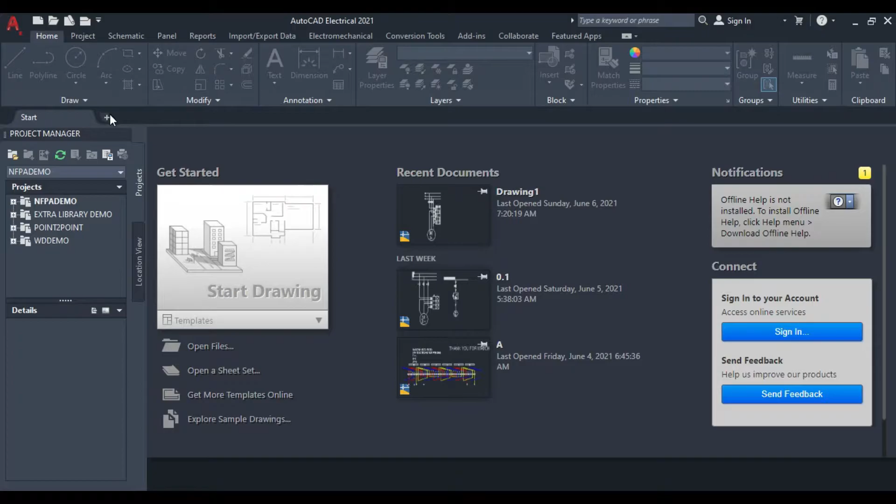We are on our third video about AutoCAD Electrical. So today I want to draw a right and left turning key that is a three-phase key. So let's start. Click on new drawing. Wait until it opens.

So now that it's opened, click on line. We are going to draw 3 lines. First line, okay. Now choose dimension. We will make it about 2. I think 2 is good. It doesn't matter. We just want them to be at the same distance. So we'll make it this much. Okay. Click on it and click on copy selection.

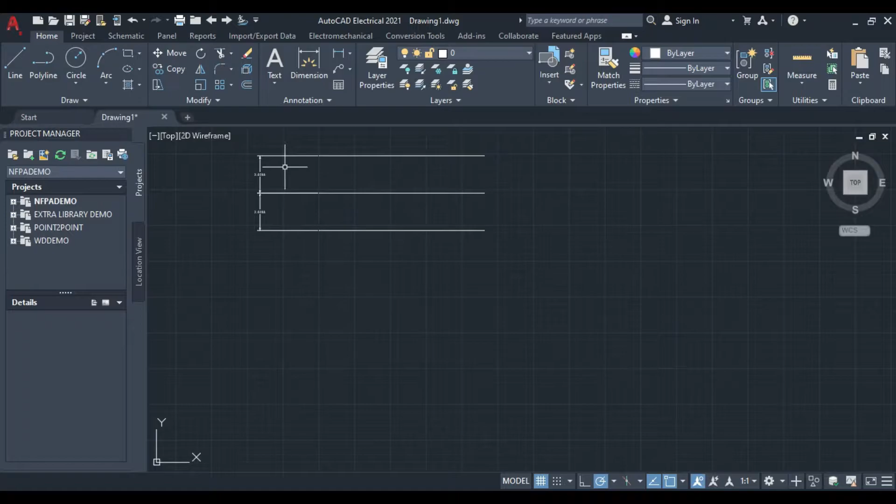So now do it again. So we are all set. Click on the first line that you have drawn and click on copy selection and copy it again. So now we are all set. Delete the distance that you have made by erase. So now it's all done for now.

Now we'll make 3 lines for the phases coming out. 1. So now we are going to make distances. So how much should this distance be? It's like about this. So it's okay. We will copy selection it again in here. So we are all set again in here until there.

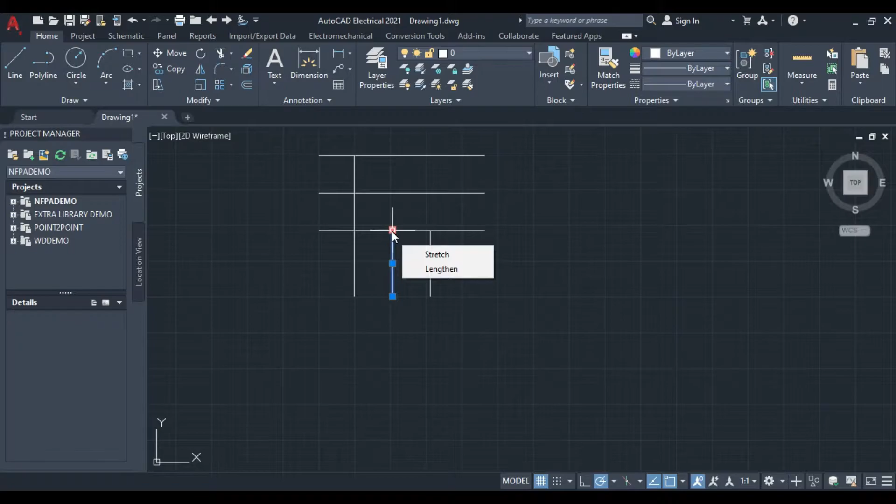From here until here. So click on this and this and erase. So now I think I made a mistake, so connect this to the second line. Okay, we have our 3 phases. Now click on text. It should be a single line one.

Now we are going to write L1 for the first phase, L2 for the second phase, and L3 for the third phase. So now make them in one line and in one position. So it should be there and it should be here. I think no, here is good. So we are all set and we have all the 3 phases.

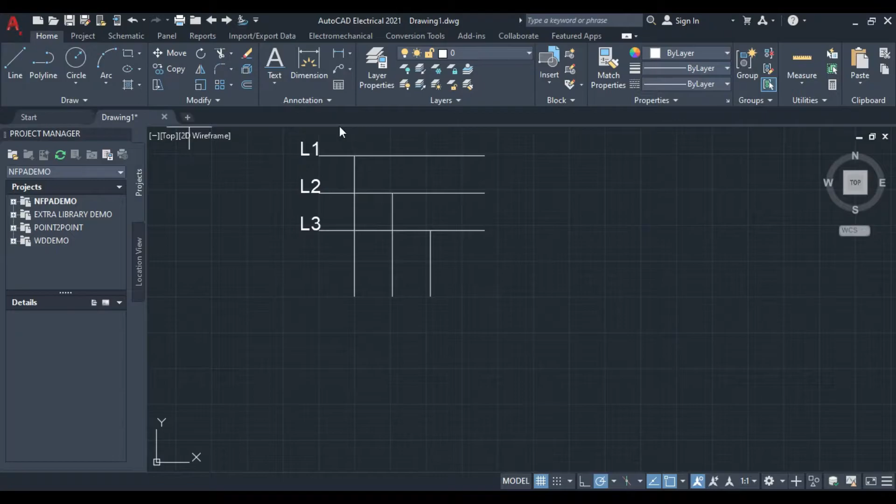So now draw a box. We will use rectangle. So go here a little down, cancel, press. I will do it again. I will make your work easier here. As you can see, each of these should be 3 squares, and we will make 5 parts: 1, 2, 3, 4 and 5. So from here 1 part is here.

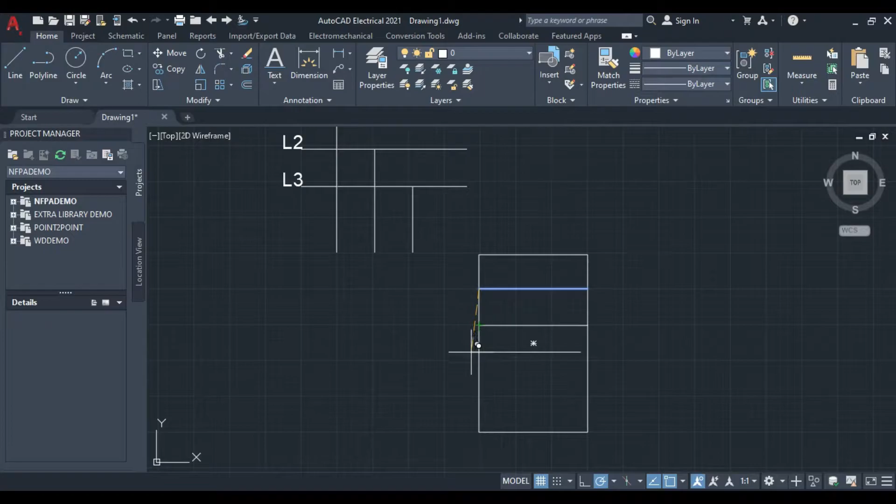Click on copy selection and move all the way down, and again copy selection and again. So here we are all set. Click on line again and go all the way down. Thank you guys if you've done it. And again here we are all set. So move it a little bit down.

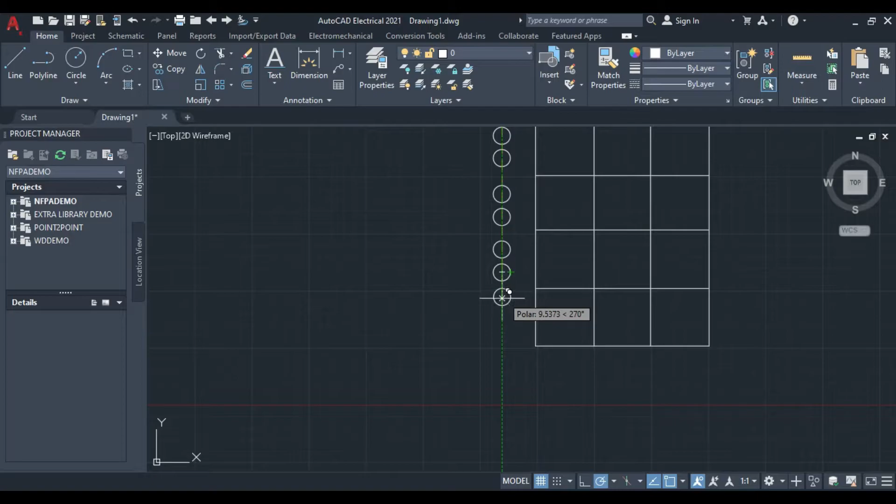So now you should draw some circles with numbers. Here 1 circle, we copy selection it here, here, here, here, here, here, here, and here. So it is good and they are in one line.

So now draw a number for each of these. Move it a little bit near the shape. Here is good. So now we will write numbers, single line, zoom, and I think it's good.

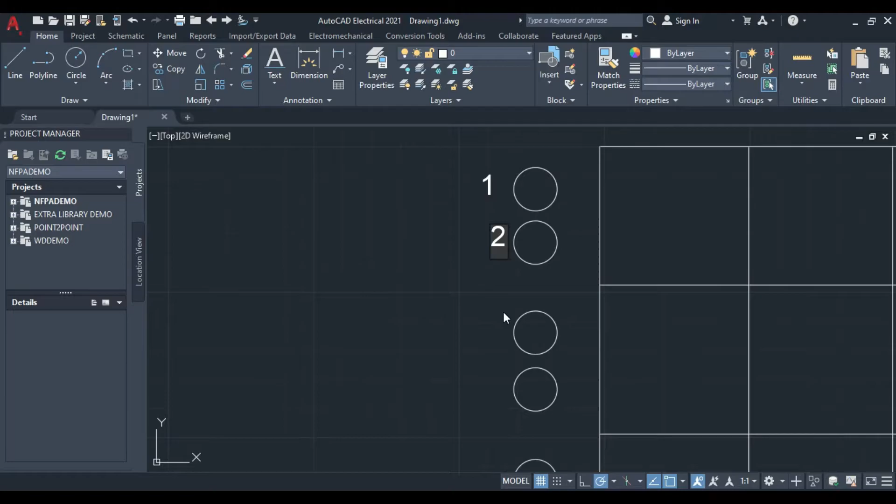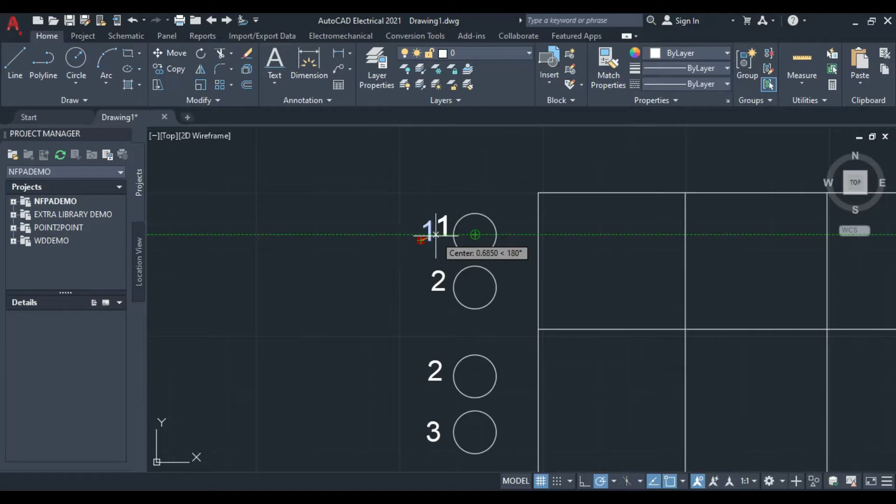So the number of this should be 1, the second one should be 2, after that again 2, then 3, 3, 4, here again 4, 1, 5, and 6. So it's all the way down for this. So now we should make them in one line. Here is good for 1, and should do it for 2 too.

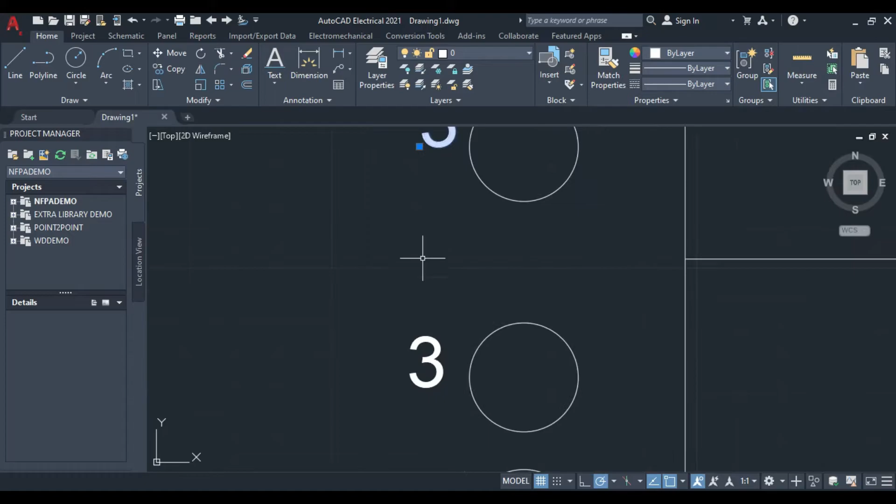Again, you will do this until all the numbers are in one line and in good shape with the others. This will make your drawing better looking, and you will be a better engineer if you pay attention to these things. So we are doing it all the way until then.

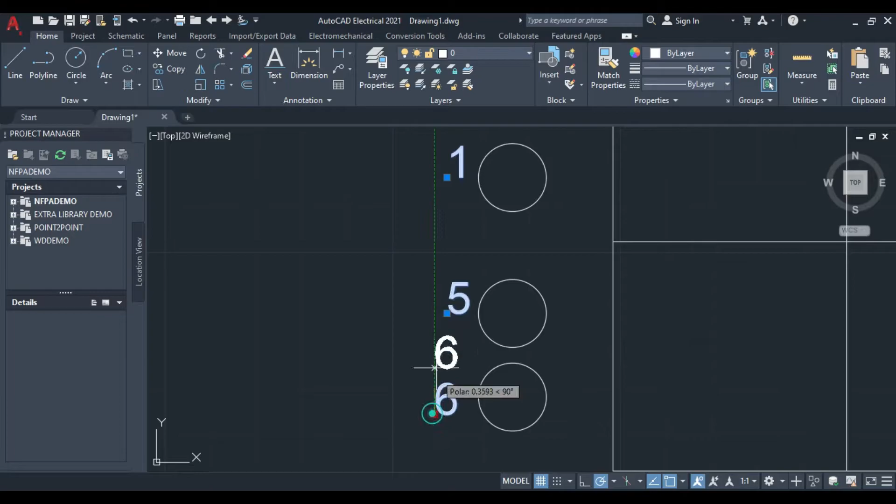You can do this when you are drawing the circle, and it will be more efficient, and you will spend less time on numbers, but at that time you should do something else too, and it will take some time, but it's okay. So it's all for the circuit diagram. Now we should connect some parts.

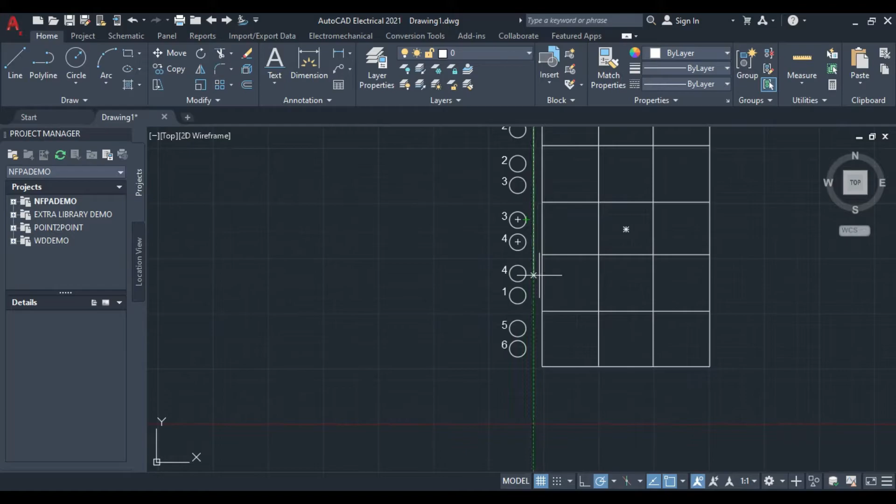For example, here, as you can see, I'm taking it all the way down to 1. So you should see here is 1. So here is connected to 1. And we are going to connect some other parts here. Here, as you can see, 2, 2. And now we are going to connect 3 to 3. So now we are going to connect 4 to 4. So we are all set.

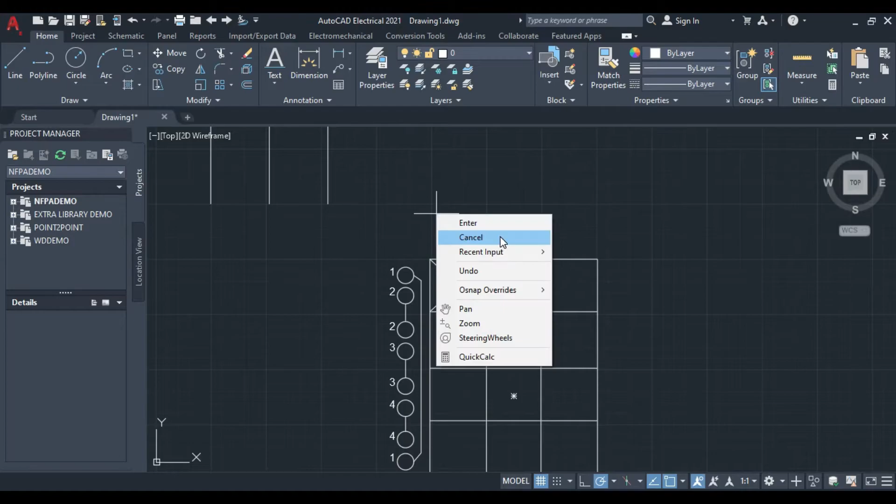And we should remember doing other things too. Here we have a connection. When you turn your key up or down, it will be like this. The way that the switches will connect to each other is defined by these x's that you have in your shape. So you should draw one in here too, and one down, and again. And I will explain why we don't have any x's in the middle part of the shape.

So do it for all of your shapes, until you reach the end. So the end has two x's, and you may ask why. Because when we want to turn a three-phase electromotor right or left, we only need to change the position of two phases. For example, we can change 3 with 1, or 2 with 3, or 1 with 2. It's not important which one you choose, but it should be two of them.

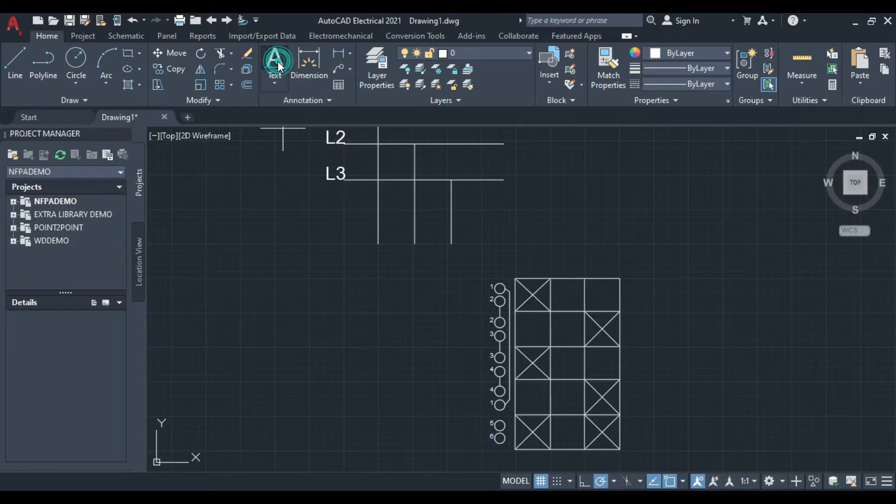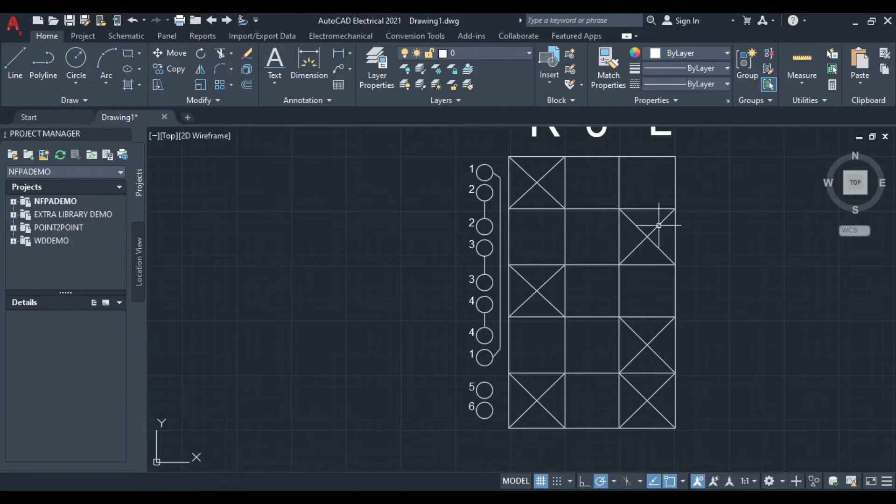So now we are going to write here a big R. It means it will turn to right. Here a 0, and here an L for left. So you may ask why in the middle we don't have any x's to be connected. Because at the 0 point there is no contact, because the motor is off. When we turn it on, for example, we make it down, it will rotate to right. So the rotation is to right, and the part 0 is for stopping the motor.

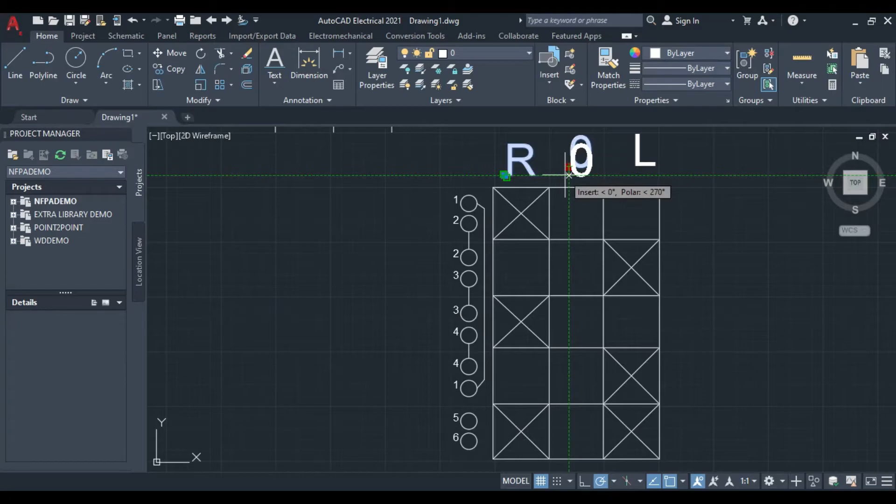So now do it for all your shapes until the end. So here we are all set. Now we need to move all the shapes up a little bit, move them up. So here we are. Now that we have moved them, we need to draw another circle, and I will tell you why and what this circle is for. So this circle is practically our three-phase electromotor.

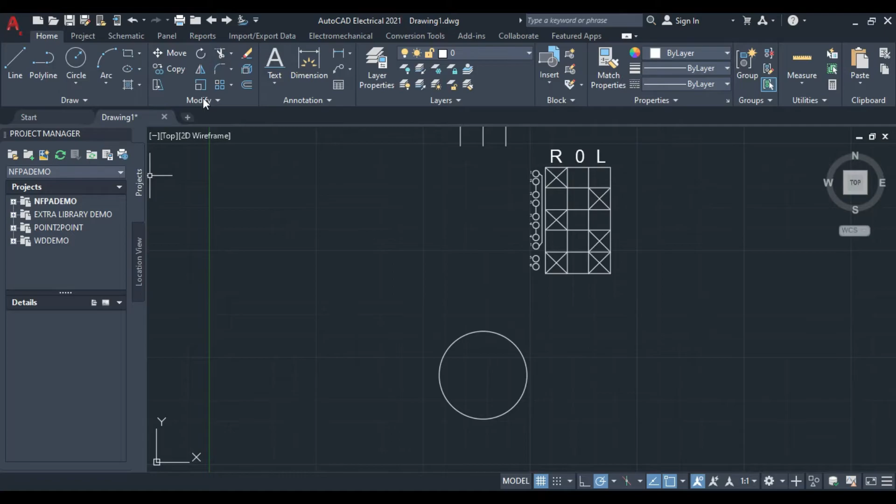And you may ask, doesn't it have any special symbols to say it? And we say yes. So for a three-phase motor, we draw a big M. So here is our M, and you need a three and something to indicate that it is alternating current. So you will click on this. It's a little small for here, so we need to choose another or make it bigger. So I think it is good now.

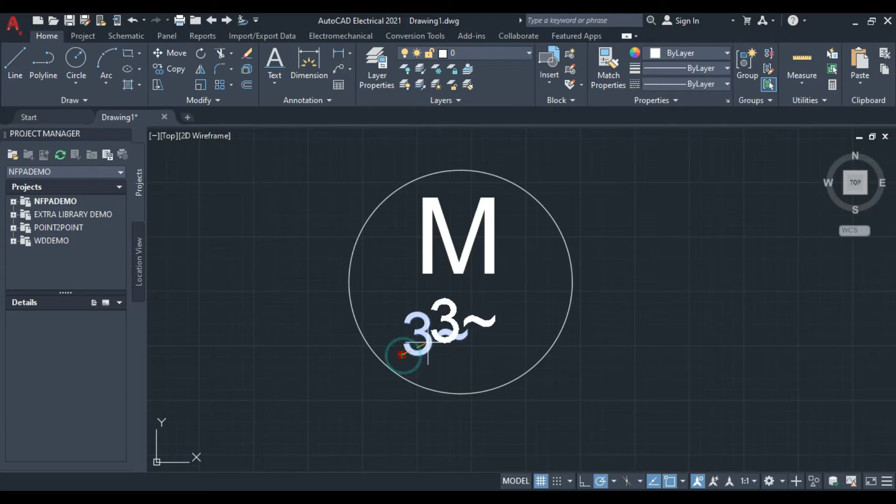So we write 3, and after that alternating current. This represents that this is alternating current. So we have our shape here. So now we are going to connect the 3 phases to the key that we have. So the first phase that we have will go here. As you can see, this line will help us know our line is straight and where it ends. We are going to connect the number 2. The number 2 is going to connect to 3.

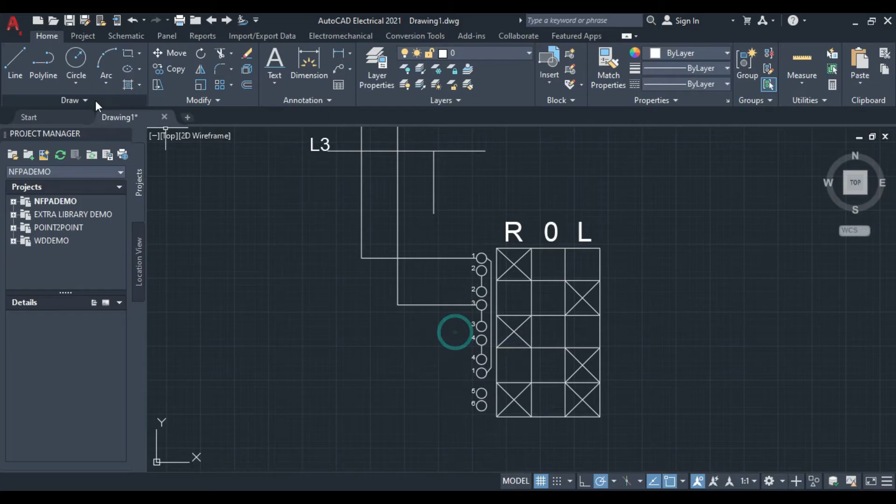So here it is, as you can see, and here too we are going to connect it to number 5. So here is our number 5 connected. So all of the phases that are coming in are in their right position. So now we are going to draw the way out. So the first phase that we have is coming out from 2. So here it is connected. This is not a straight line, so I will make it a little bit straight until here.

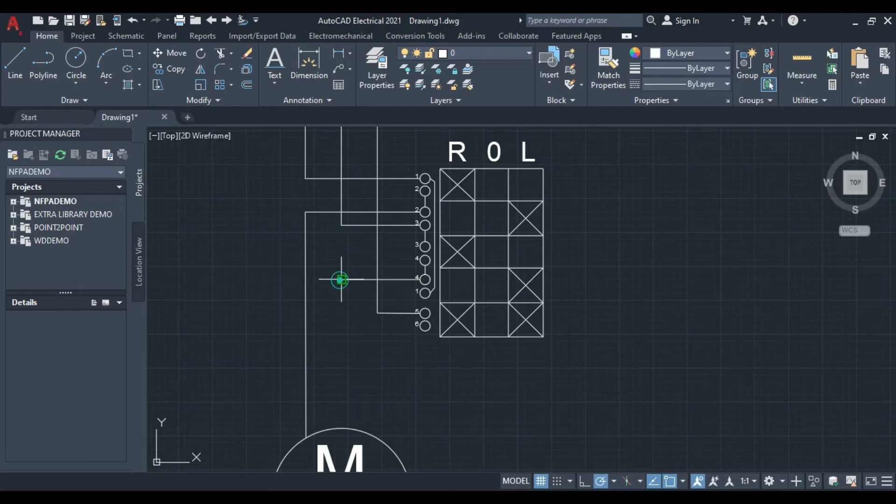So now we will move it down a little bit. Oh, it's straighter than what it was. So this is for the first phase. Now we need our second phase. The second phase is coming out from 4. It's here, as you can see, and it will be right there. And the phase 3 is coming from the number 6. So it will be like this if you want.

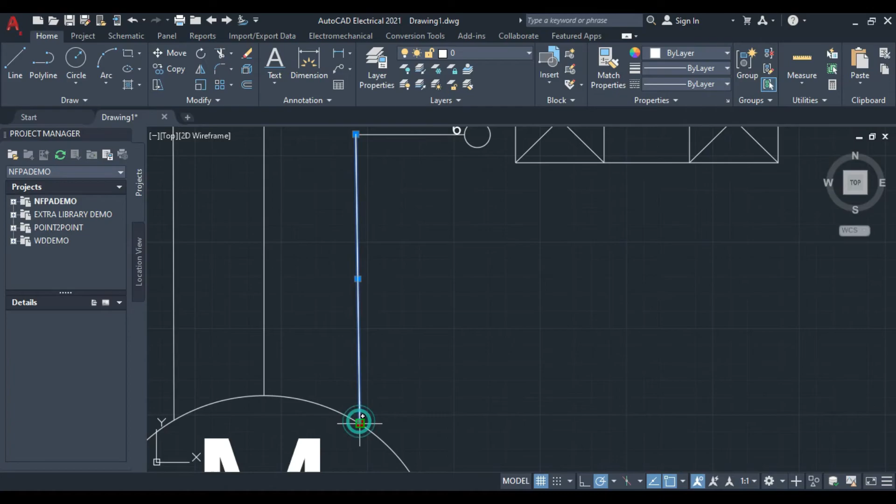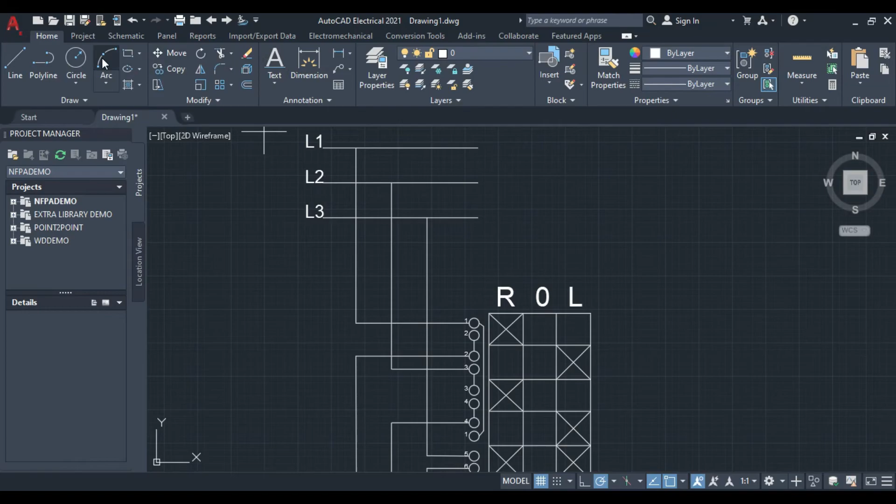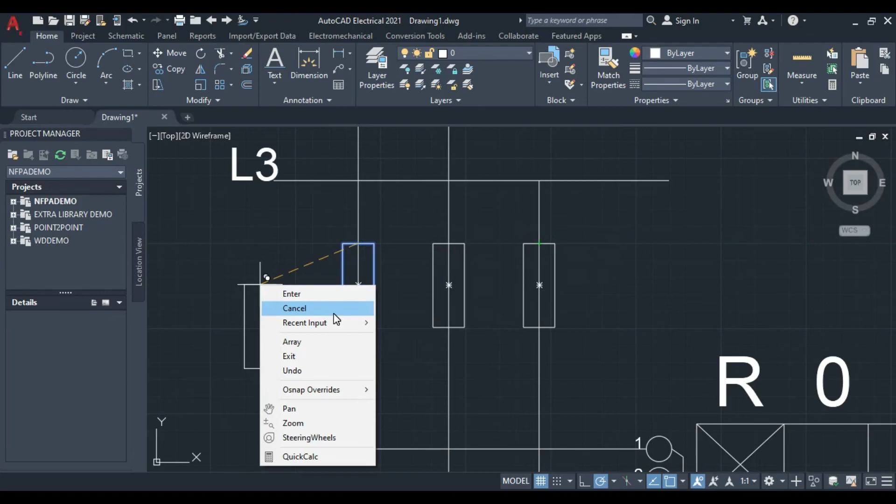So here basically we connected, and remember we need fuses or circuit breakers. We are going to make circuit breakers. So I want to make them a midpoint for it. When you see this triangle is empty, it means it's in the middle. So now we are going to do a copy selection again and again. So we have our 3 fuses in here, and they are right in the position that they should be in. So we are going to write their name.

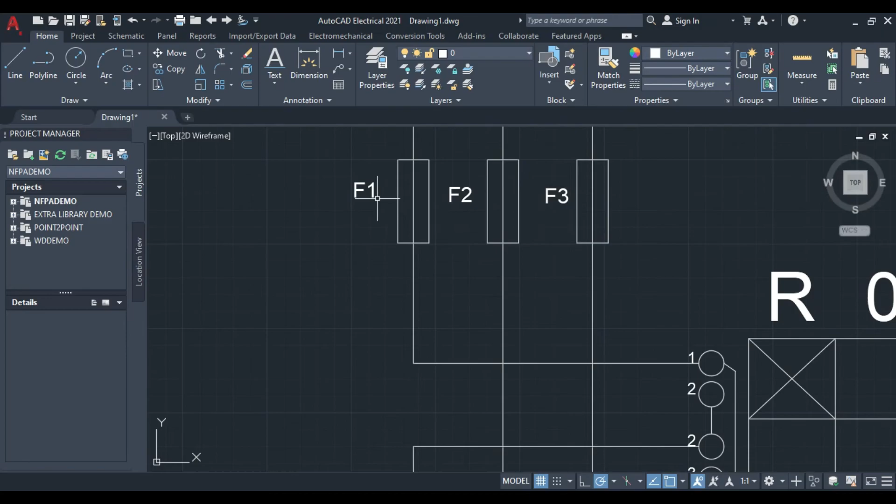So this is F1. It means first circuit breaker, and the second one and the third one. So we are all set. We are going to make them in one line. Here is good, here is good for you, buddy, and here is good for you. They are all in one line, and finish. I think this is the shape that you will have.